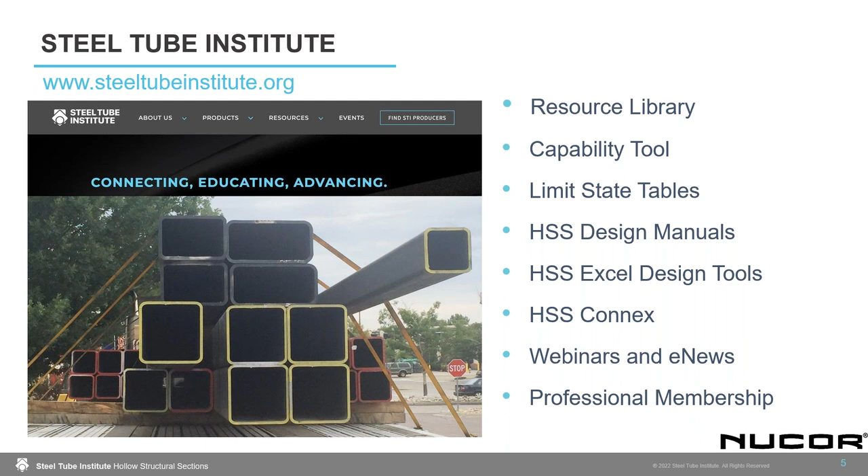Thank you, Kathleen. Hello, everybody. Good morning and good afternoon. As Kathleen mentioned, today we're going to talk about HSS welds.

So what's the big deal? Why do we need to devote a webinar to those welds? They're pretty common, and there are definitely some best practices that will lead to more economical structures and happier fabricators, which in turn leads to happier designers.

So we're going to talk through some general considerations, how you actually design those welds, then some considerations that maybe we as designers don't always think about when it comes to the person actually performing the welding. And then we'll touch on AESS at the end of the presentation.

This structure that you see here on this slide does have architecturally exposed structural steel in that roof member.

We were involved in the connection design for this fabulous structure at Lewis University, thanks to White & Company.

As I go through our talk today, I want to first clarify some terminology I may use, as I might bounce around a little. When I talk about a branch member, that's what's being connected to the main member. A branch member could be a plate, or it could be a branch like in the traditional sense of a truss member. Chord members are typically what we're connecting to the main member that is continuous. So for the connection on the left, that would be the column, or again, in a traditional truss, we know what a chord member is.

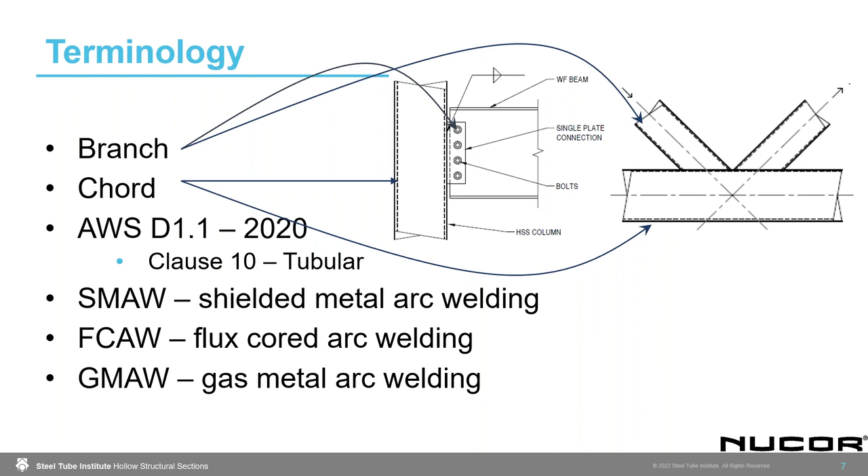There are some quotes that have been made. These, I think, are most impactful to me when thinking about HSS welds. Blodgett says, provide a path for the force to enter the part that lies parallel to the force. Well, thinking through that with an HSS, that can be complicated, as the path is most likely to the sidewalls. Dr. Miller says a good welded connection has a clear and direct load path. Again, with an HSS, that can be a little bit difficult.

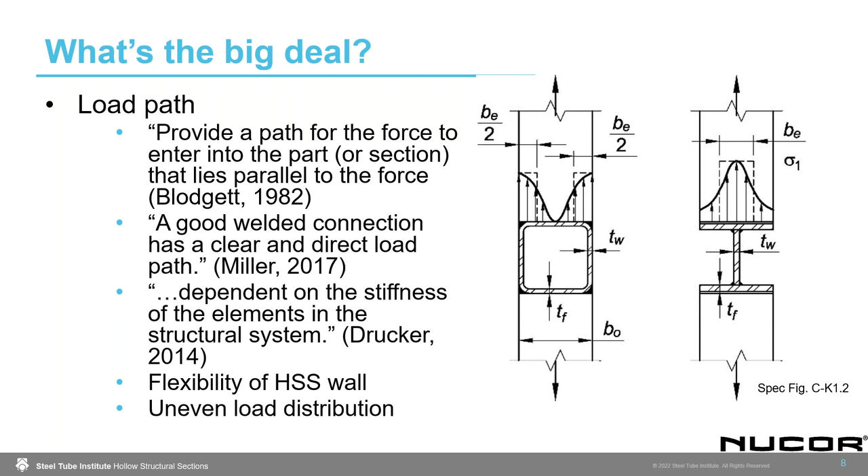When we're talking about HSS welds, one complication is that we can only weld from one side usually. So that usually will lead to larger weld sizes. Also, what's a little bit unique about HSS connections, as you likely know, is that the member selection or the member thickness is tied to the connection capacity significantly. So that causes some issues in the way that we typically design our connections.

Some EORs don't design connections. They will design the member, and then there will be a delegated connection designer that has to take care of the connection part. That leads to issues because often the connection capacity is tied to the member thickness, and therefore when we have the discontinuity between the two parties involved in that design, that can lead to some issues. So it's super important, and I hope I'm making my point here.

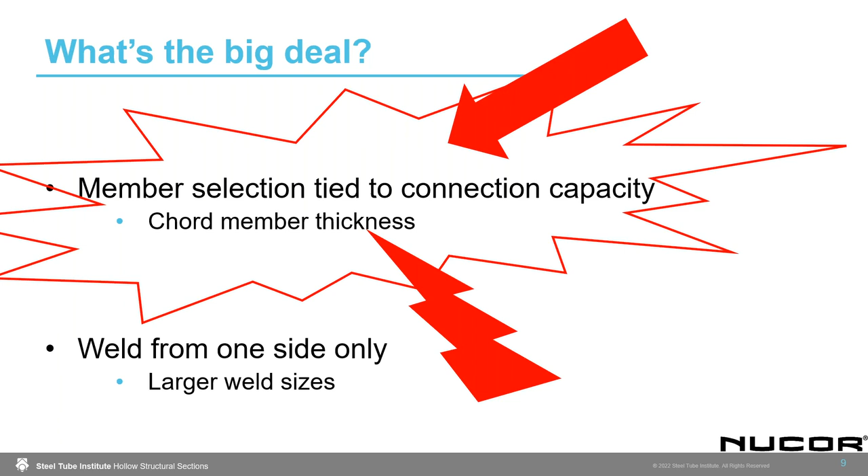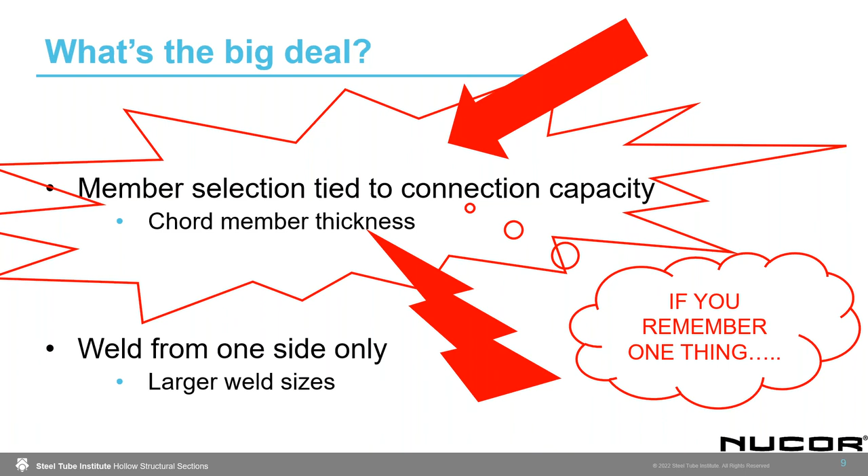If there's one thing that you remember from today, it's that the demands on a connection may require the member size to be increased. This is very different than the philosophy we typically follow with open shapes. And it's very important for the person designing the main member to actually think about the connections as well, even if you aren't the one responsible for designing the final welds, bolts, and plates to it.

So there are a few general considerations I want to talk about as we get started. First is a design philosophy when it comes to sizing welds to HSS members. There are two different design philosophies that have historically been employed.

The first is to develop the yield strength of the plate or the HSS member. That's easy on our drawings—we don't have to think about the forces, we just say develop the yield strength of the plate and HSS branch. However, I hope we recognize that because this is the upper limit, it's very conservative, and in most applications it's not needed. There are some reasons for doing that, but it's really not required because it's a very uneconomical way of designing your connections.

The second option is to resist the actual applied force in the plate or in the branch that we're connecting to the HSS member. This is really where today's presentation is going to focus, because it's the most economical way to design these connections. This is where I want us to pay attention as we go through these welding provisions today.

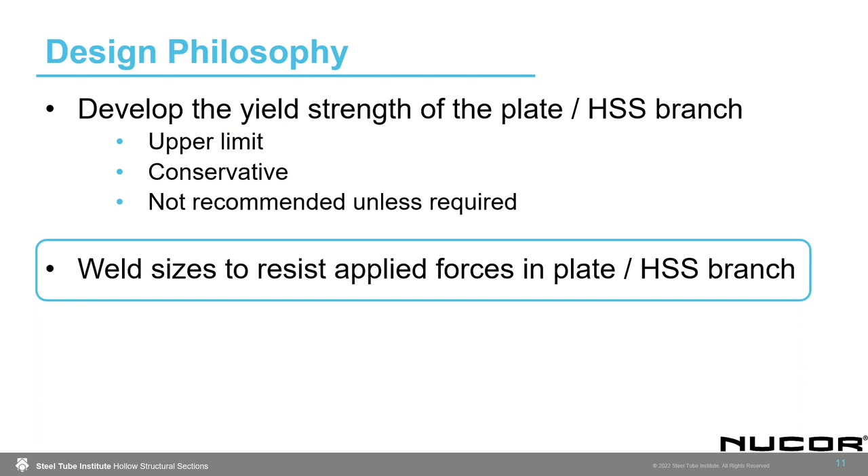Additionally, the larger the tube we're connecting to—the thicker the tube—the larger the corner radius is. 2T is the average for the industry for the corner radius, based on the thickness of the tube, so a thicker tube has a larger radius. The larger the radius, the more we can run into issues where we need backing, which we'll talk about in a bit, impacting both design and fabrication costs.

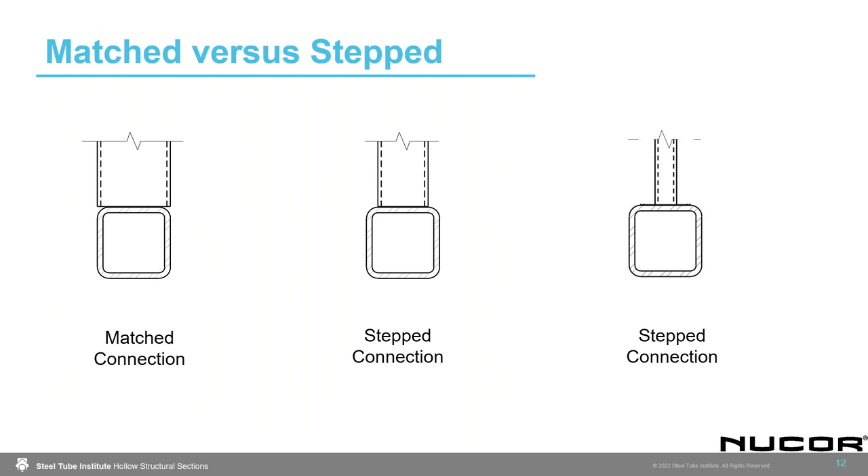However, if the element we're designing is maybe a roof truss or a bridge over an overpass, where we're looking at it from a large distance away, I might not be able to tell that we're looking at a matched connection versus a stepped connection. So it may be worth bringing this up to your designers that there's some significant savings if we can make these branches a little more narrow so that they can be welded to the chord members using fillet welds and avoid the complexity of a matched connection.

Likewise, I think we can bring up the same topic as designers with K-type connections. As defined by the specification, you more or less have an equivalent load coming in and going out of each branch member that defines a K. There are two different types, gapped versus overlap, and these two types have very different fabrication costs.

Overlap connection, you typically end up with a stiffer joint, a stronger joint there. So we may lend ourselves to that type of connection. It's also great for fatigue.

However, think about the logistics of putting that together in the fabrication shop. Historically, in a gap type connection or other truss type connections, we have some flexibility for fit up. We can tack weld those members together before we perform our final welding to make sure everything's going to go together easily and adequately. With an overlap connection, I don't really have the ability to do that. I have to make some final welding because one of those toes, the hidden toe, is going to get covered up by another member. So I might need to make some final welding before I'm sure everything's going to go together well and easily.

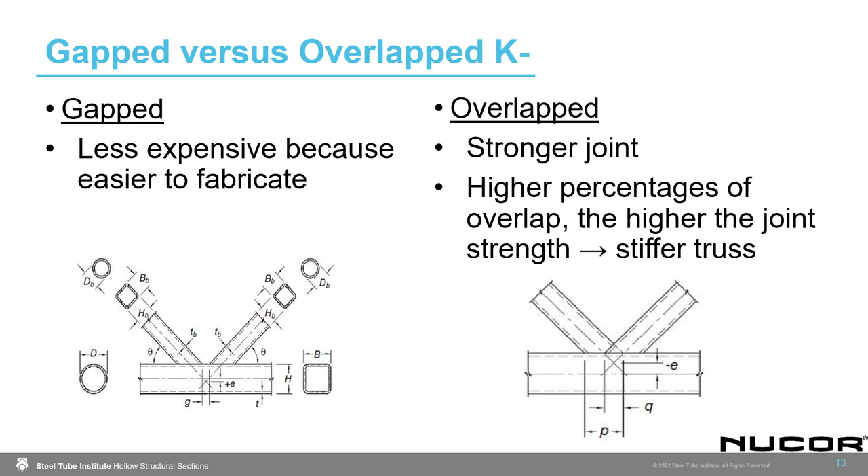Think about also putting these members all together. When we put them together, we have to make cuts to make sure they fit. The fabricator has to cut them. We can't always have a perfectly square cut. Unfortunately, most things don't always go together that way for HSS. So you may have something like these two diagonal branches here, where we've got cuts at 45 degrees. For rectangular sections, it's not the biggest deal.

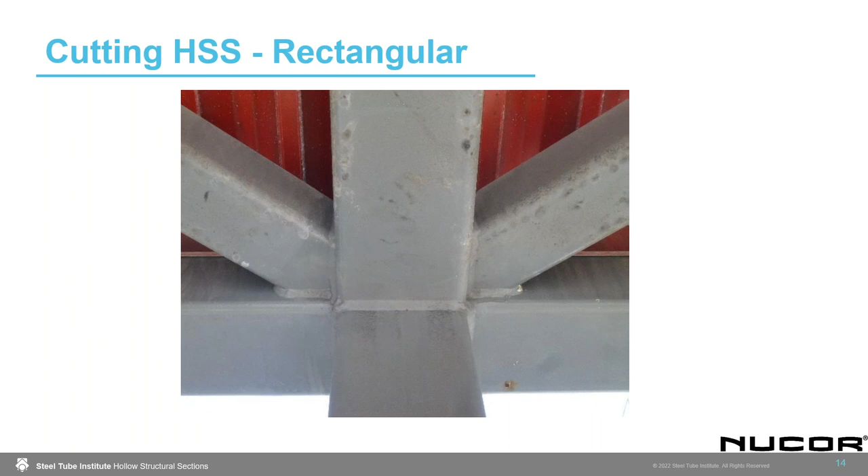It's much easier to make those cuts at a certain angle, and the fit up of this particular joint can be put together. But think about a similar situation where we're trying to make the cuts on these round sections. This particular example isn't so bad, right? We've got a very large tube that we're connecting smaller branches to. So while it's not going to be a square cut, there is some profiling that needs to occur to put all these pieces together.

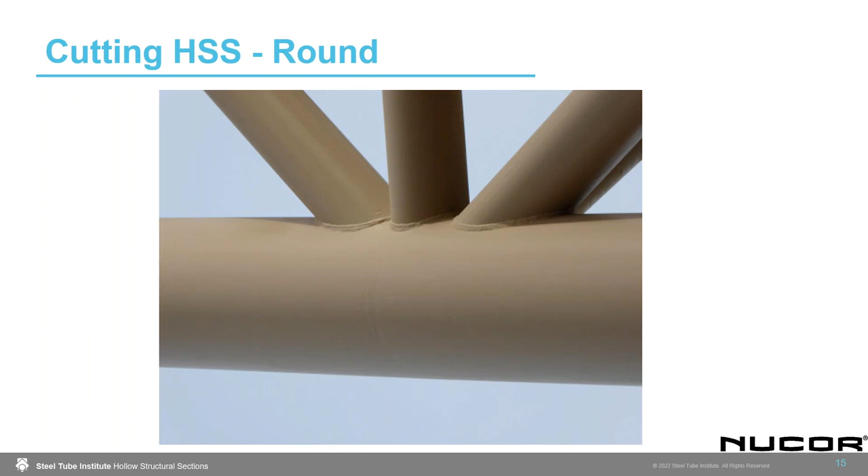But if you think about something like this, where maybe we've got a 10-inch OD branch member coming into a 10-inch OD chord member, where they're kind of a quote-unquote match type connection for rounds, there's a significant amount of profiling that needs to go into the cutting of these round sections.

Historically, that's been done by paper templates and then cutting it by hand. More often now, there have been some advances in laser technology and tube lasers, which is what you see in this picture. What I want to impress upon you is that this is another piece of equipment, and you can imagine that using round members is likely going to be more expensive in fabrication than the square members, which are a little easier to cut.

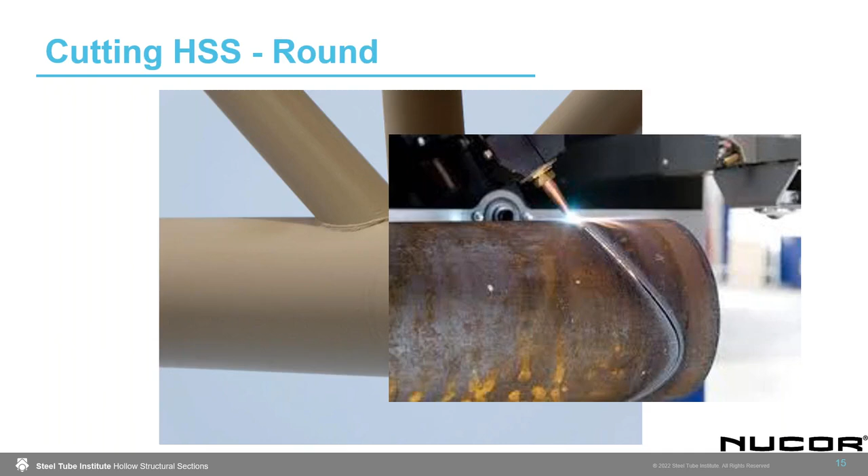Some of the technology available here is this Vernon tool offered by Lincoln Electric. This is an industrial pipe cutting and CNC pipe profiling machine, which you can see the different types of cuts that are applicable, or that the machine can perform.

That 90-degree saddle is very much like what we were looking at in the previous slide, where the cutting is actually taking place. But think about something also like this 45-degree lateral, maybe a branch member coming in at a 45-degree angle to another round member. So we've got a lot of complex profiling that needs to occur to get that fit up just right. Obviously, you can see the benefits of using a tube laser for that cutting to get that connection put together adequately.

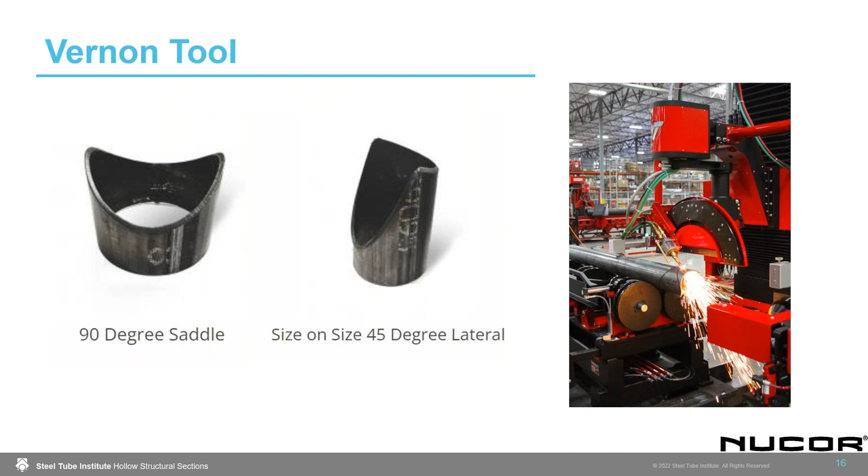Another thing to think about with rounds versus rectangulars is actually putting this together. We talked about the differences between rectangular sections and round sections in cutting in the previous two slides. Now let's actually put these pieces together.

So here you can see we've got two verticals. We'll assume this is a continuous chord member, and now we need to add another branch member in the middle. This will have square cuts at each end, and you can just slide it into place very easily, right? With the square cut, it can be slid into place.

And then if we've got some branches coming in, or some diagonals coming in at 45 degrees or whatever the exact angle is, again those are going to have kind of those square cuts, but at an angle. But again it can just be slid into place, and it's all going to fit, and then can be welded from there. But let's think about that for the case of a round HSS truss.

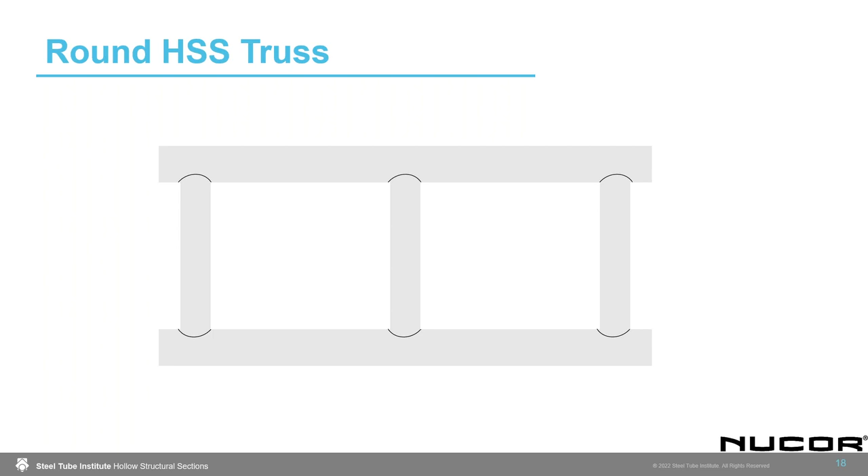So again, with the same starting point where we've got two chords and two branches, like a T connection, if we want to add an additional branch in between the two, how do we get this into place? We actually have to splice this member in order to get it into place. We put each half in and then splice the piece together to be able to install it.

Then if we've got some of the diagonals like we had in the previous example, how do we get this guy in now? Because of that rounded member, we can't slide it in. The ends have to be profiled in order to make the welds. So it's very difficult to fabricate something out of round HSS like this.

There are fabricators that are very good at it and do a great job of it, and it can be done. I'm not saying that it can't be done. These are just some of the factors for you to think about as you're selecting your members and sitting with your designers, that it might be a more economical option to fabricate based off of rectangular sections.

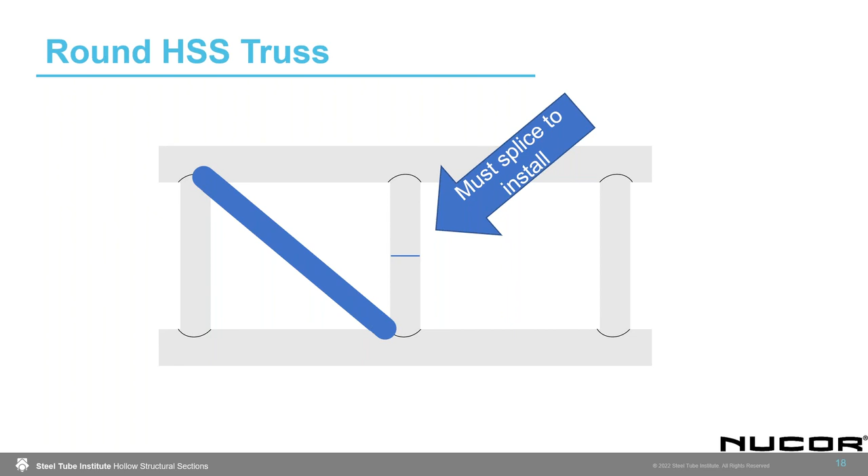All right, a little bit about weld effective length. Going back to what we were talking about for welding across the face of an HSS, which we started in I think the first slide of the presentation - if we're designing to resist the actual loads, as I mentioned, we're going to spend most of the time today talking about, we have to account for the non-uniformity of the load itself, of the stress in the weld.

As we mentioned earlier, the HSS wall is stiffest at its ends, closest to the sidewalls, and it's lowest in the center. The weld could unzip with cracking, and that's going to start at the extremity, so on the outside.

So for transverse elements, we need to use an effective width when we're designing transverse to the longitudinal axis of the member. Even though the full weld isn't effective - we don't use the full length in our calculations because it's not effective - a continuous weld is still required. I want to make sure that's clear, that still needs to be employed.

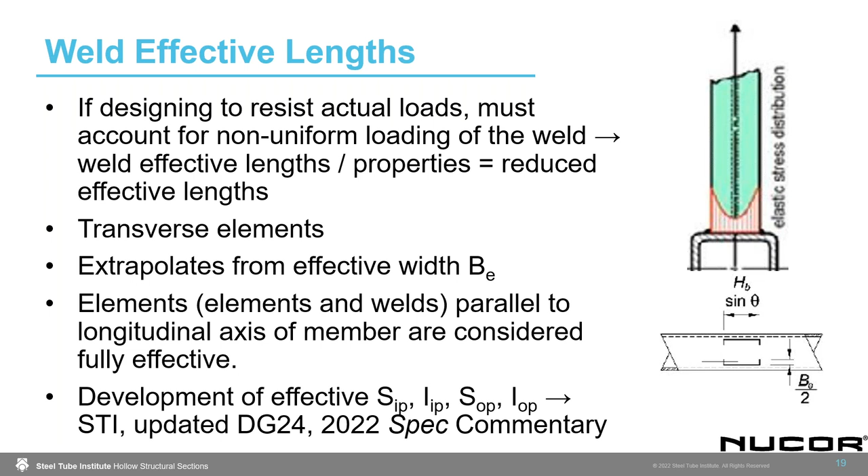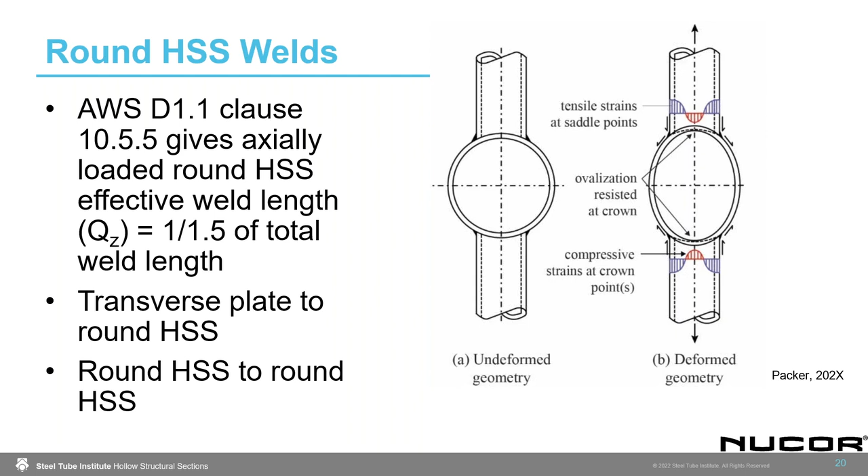So that implied 2/3 of the total length is what we had to go by previously, and this would apply to a transverse plate, to a round HSS, or round HSS to round HSS. It isn't always super clear, so a great addition to the 2022 specification, which will be out later this year, is the addition of these effective weld properties for connections to round HSS. This is new in 2022.

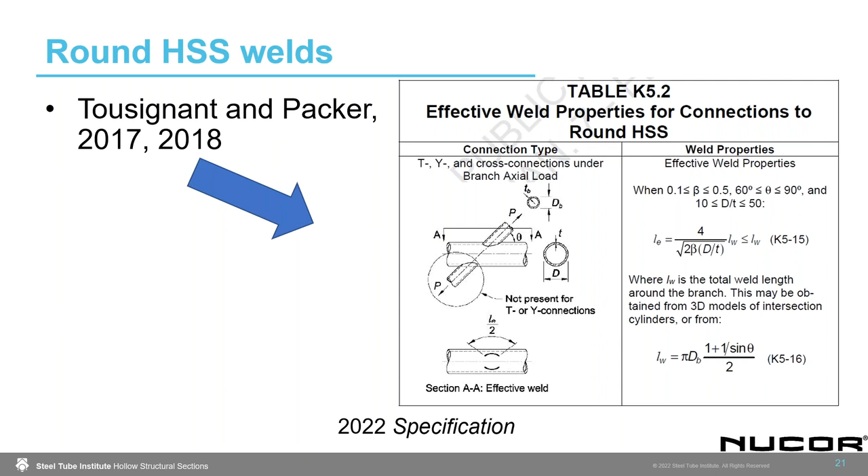It's not in the specification right now. As I mentioned, it'll be out a little bit later. This is based on some research done by Dr. Packer and Kyle Tousignant at the University of Toronto. You can look up their technical papers if you wish to see the background behind that, but this will be employed in the specification going forth.

Another thing to think about is if we're welding round HSS to round HSS, we know we want to try and stay with a fillet weld because we know those are most economical. But it's likely going to be difficult to obtain the full fillet weld throat thickness. The dihedral angle of the joint needs to be maintained. This likely can only happen with a fillet weld if you've got a small beta, so a small ratio of the dimensions from the branch member to the chord member. That dihedral angle needs to be maintained between 60 and 120 degrees, which is kind of difficult.

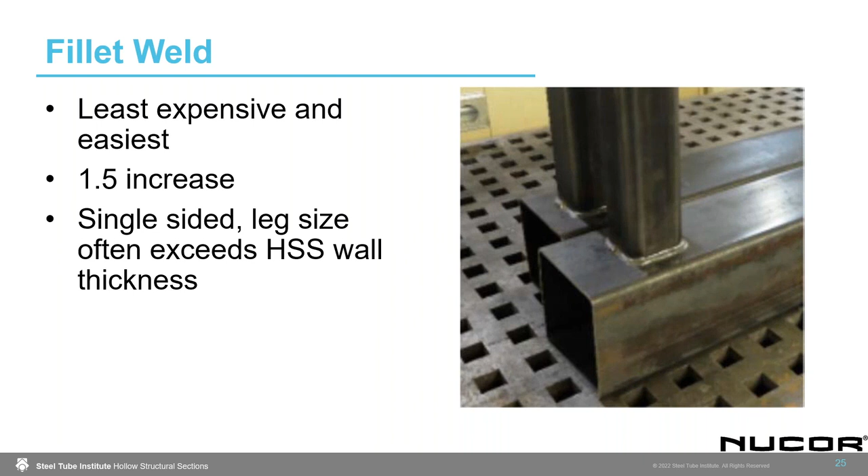So yippee, thanks guys. All right, let's move forward to a little bit more discussion on HSS weld design, starting first with fillet welds. We love them. It's well known that these are the least expensive and easiest welds to make. There are considerations for a 1.5 increase that we need to talk about coming up here. But as I mentioned earlier, I want to reiterate here, the biggest difference between HSS connections and connections to open members like wide flange channels and angles is that they have to be single-sided. We don't have access to both sides of a tube wall typically. And so the leg size can often exceed the HSS wall thickness.

There has been some misuse of a particular spec item that I wanted to bring up just to clarify. This particular clause that I'm referencing here in D1.1, and also occurs in the AISC 360 specification, talks about a limitation on the size of the weld that is applied to an edge of a member. The reason for that is that you might melt away the top edge of a member.

You would end up with a normal weld toe, but the corresponding weld throat thickness is much smaller than intended if you melt away the top edge of that member. The provision states that the maximum fillet weld should be the thickness of the member minus 1/16 of an inch, so you can confirm the edge is not melted and the proper throat thickness is achieved.

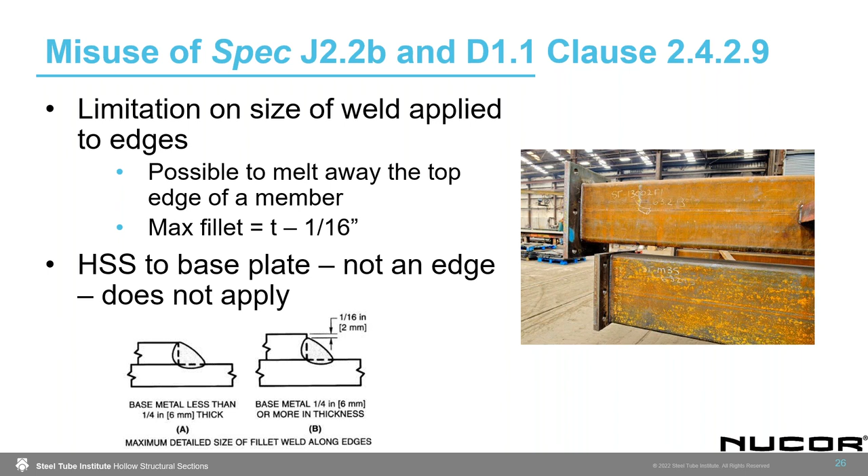When we're talking about HSS to base plates, these are not an edge, so this particular provision almost always does not apply to HSS connections.

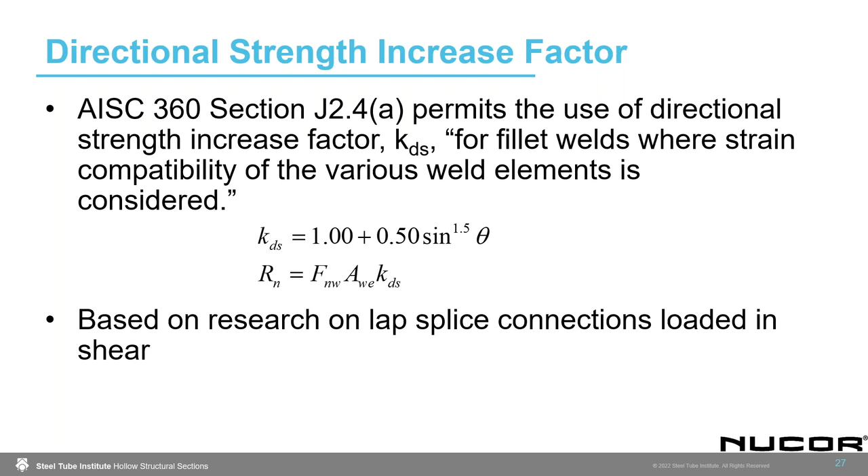The directional strength increase factor has been in the specification for many years. It's based on research on lap splice connections loaded in shear, and additional recent research has brought it into question. The specification states that we can increase the strength of a weld by a factor ranging from 1 to 1.5 for fillet welds where strain compatibility of the various weld elements is considered.

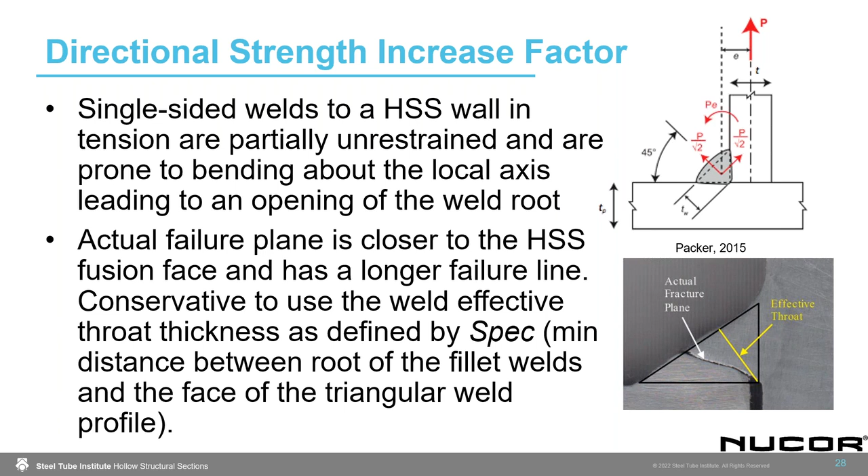Going forward, what we've found is that single-sided welds to an HSS wall specifically, though it's pertinent to think about single-sided welds this way in general, are partially unrestrained when in tension. This can induce bending about the local axis, leading to an opening in the weld root, as shown in the diagrams. The actual failure plane is closer to the HSS fusion face and has a longer failure line, so it's conservative to use the weld effective throat thickness as defined in the specification. The restraint provided to the fillet weld depends on the HSS wall thickness, shape, weld size, and penetration.

The effect of this bending about the weld root is much more severe on rectangles than it is on rounds. A weld that is round in shape has more restraint to it than one along the face of a rectangular HSS, which is more linear. The research supported this theory and found that the directional strength, or 1.5 increase, doesn't result in an adequate safety factor as outlined by the specification.

In the previous specification, this was implied. In the upcoming specification, it's very clear that the 1.5 increase cannot be applied to rectangular HSS in tension. It can be applied to round HSS in tension, and it can be applied for double-sided fillet welds, like welding a plate to an HSS, whether round or rectangular, as long as you're welding on both sides, such as in a single plate connection, if in tension. It cannot be used for the effective lengths given in K5. So that's a bit of clarification on when and where you can use that 1.5 strength increase.

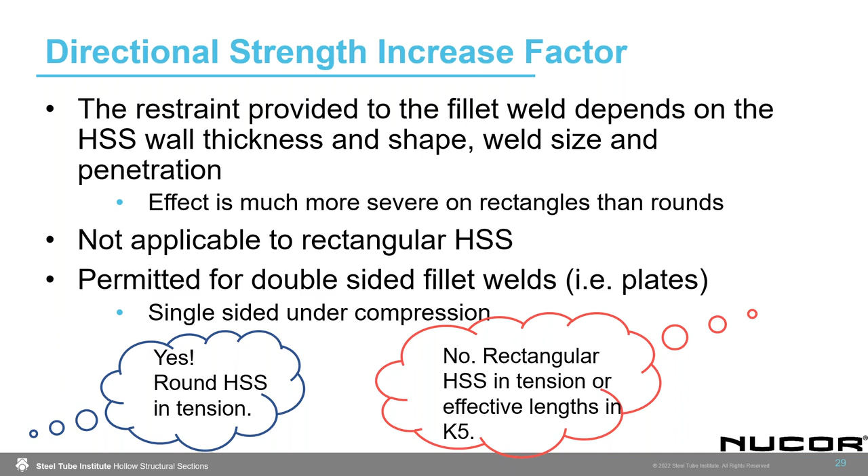When it comes to fillet weld design, there's a table like this. It's in Design Guide 24 and is updated in the newer version, but we also need to check the weld metal and base metal for shear when welding to HSS.

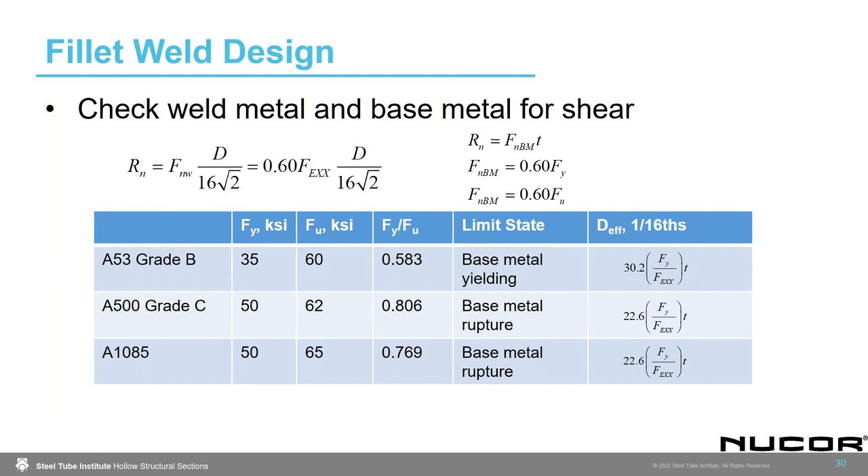A500 material in the marketplace is all grade C or dual graded B/C. This table is much easier, especially if you ignore A53, which I hope nobody is using for their design. If we just look at A500 grade C or 1085, depending on which you're using, base metal rupture is always going to control, which simplifies our weld design going forward.

There's a rule of thumb I've been asked about in the past that I wanted to clarify. It states that a fillet weld equal to 1.1 times the thickness of the branch will develop the yield strength of the branch member. You can find that in the specification commentary in K5, and it's also referred to in the Steel Construction Manual Part 8. That originates from work published in IIW in 2009 and also in Eurocode 3. Recently this has been confirmed for rounds, so it still can be used as a rule of thumb for rounds.

However, for rectangular sections, it actually looks like that factor should be more like 1.3 rather than 1.1. This hasn't been codified, it's just a rule of thumb, but if you are using or have used this rule of thumb in the past, you might want to take a look at and confirm it for rectangular sections.

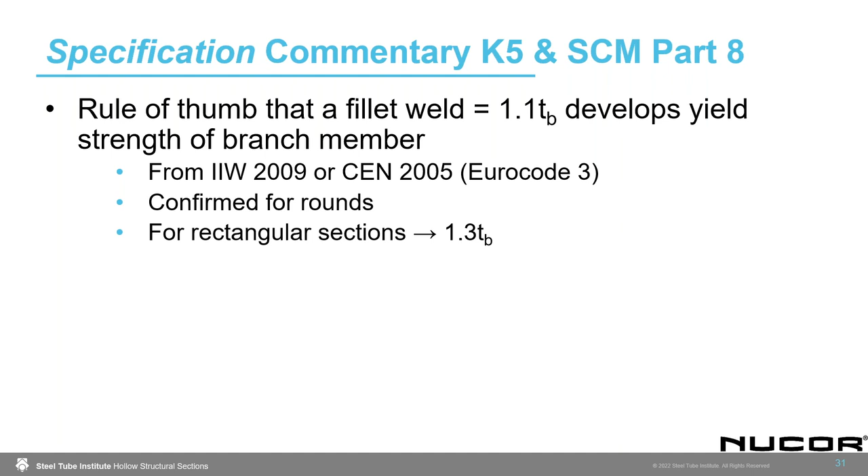Again, hopefully we're not developing the yield strength of a branch member on a regular basis. We're designing for the actual applied loads.

PJP welds are something that I hope we can employ more often, as they can be a much more economical solution rather than going straight from a large fillet weld to a complete joint penetration weld. CJPs require backing and specially qualified welders, so it's a reasonable consideration to look at partial joint penetration welds.

Welding full thickness for HSS is just complicated. The effective throat for those PJP welds is given in the specification in table J2.1.

Obviously, we don't often use or don't know what welding process exactly is going to be used. So it's really best that you specify the effective throat that you're using for your design. Rather than specifying anything else, just put that E in parentheses in your weld symbol, and then the fabricator has the ability to figure out the rest and do it how it's most economical for them.

Much like the single-sided fillet weld discussion that we had previously, you should also ensure that rotation about the root of a partial joint penetration weld can't occur.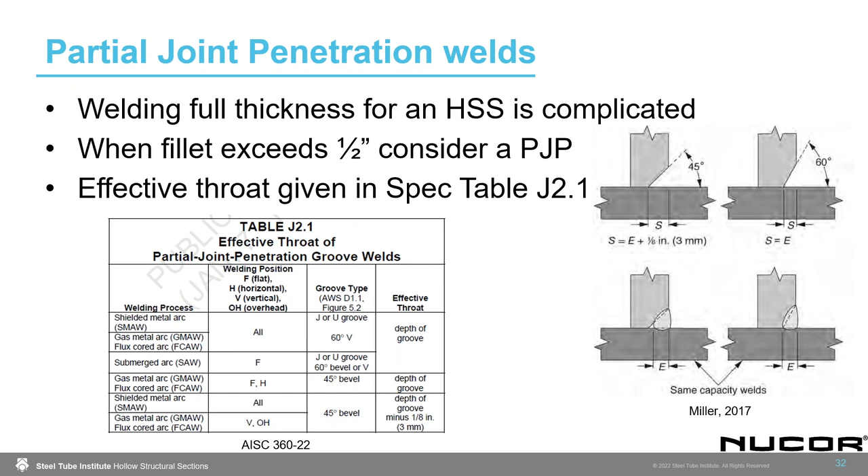Another option, if a partial joint penetration weld is not quite enough, again trying to avoid going to that complete joint penetration weld, we can reinforce a PJP. That's definitely an economical option. The capacity of that reinforced weld does not equal the sum of the individual capacities.

Again, we should specify an effective throat, which will be the least dimension from the weld root. Those are given by these diagrams, which can be found in D1.1 in figure 4.2 through 4.4. The important thing here is that we need to be considering the Z loss at the root for the 45-degree bevels as well when designing these.

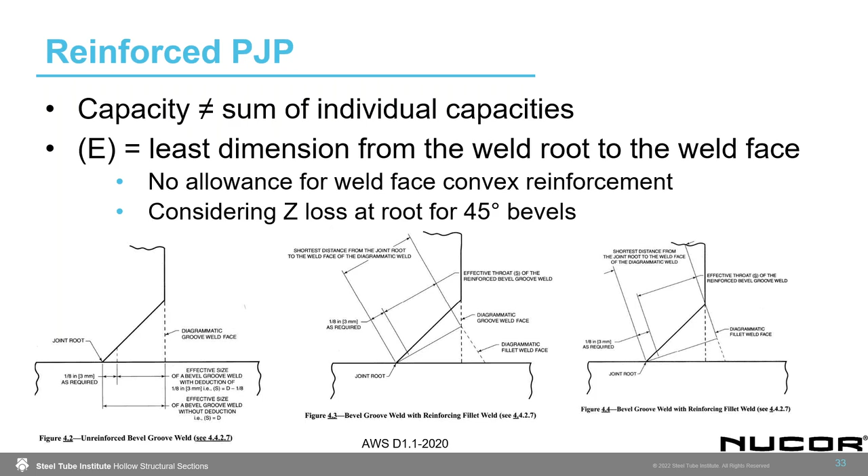Flare bevel and flare V groove welds are very common in HSS because of that corner. If we're welding to the corner of a tube, we talked about those when discussing matched connections. The actual corner dimension, as I mentioned, was 2T on average, 2 times the thickness of the tube on average, but it's going to vary in size from mill to mill. Every HSS producer is likely going to have a slightly different corner radius.

The effective throat is a function of that, though. It's given in the specification in table J2.2 and in D1.1 also. This gap that you see in that picture on the bottom left there at the weld root is common because we can't get full penetration, and that's accounted for in the Z loss calculations.

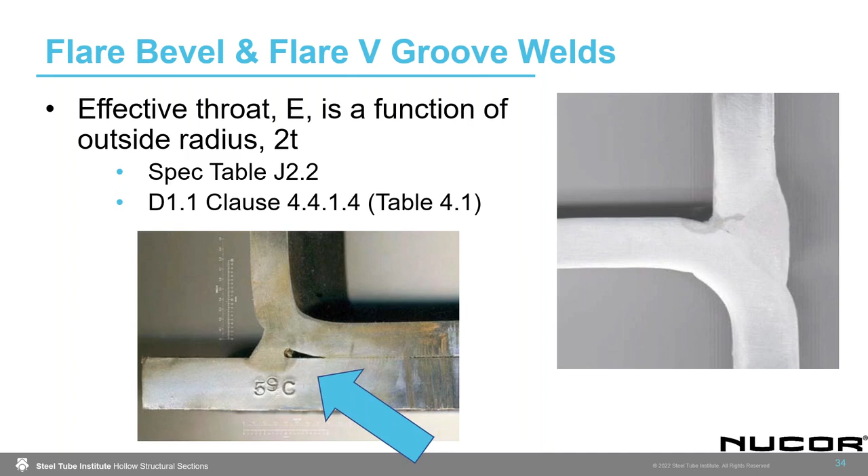These assume a weld flush to the outside of the HSS, and as I mentioned, it does take into account the typical Z loss at the root and a typical HSS radius. But these numbers given here in this table, in this specification—what I want to impress upon you is that these are maximums.

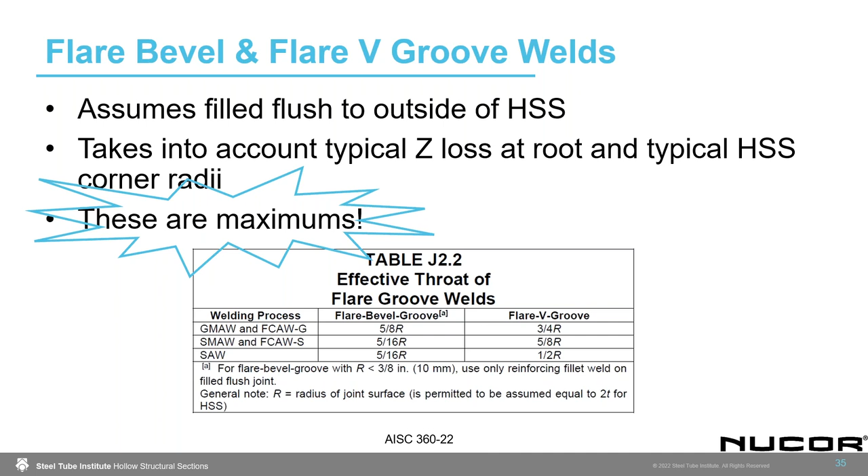So a weld flush is not necessarily what we need to have everywhere. This is definitely a case where if you don't need it to be flush in every single case, please put the effective throat that you do need in the weld symbol, and that will allow the fabricator to design accordingly. I have a fear that we put this weld symbol on all of our drawings when we don't necessarily need it, resulting in a lot more welding than we actually need for that joint.

We might be able to save some economies by actually specifying what is required. An underfilled joint is okay and can save money. D1.1 requires of us as designers to specify the effective throat for the PJP weld. I don't think we always do that—I know that I'm likely guilty of not always specifying it, but it is required.

Varying corner radii on the square tubing affects the amount of weld that is required, but these unfilled edges are okay as long as the effective throat is achieved.

What you see in diagram B is perfectly acceptable as long as the effective throat specified on our drawings achieves the design intent. The one exception is for architecturally exposed structural steel. The Code of Standard Practice says that underfilled joints for flare bevel groove welds or flare V groove welds have to be filled flush. That's the one exception for that AESS category.

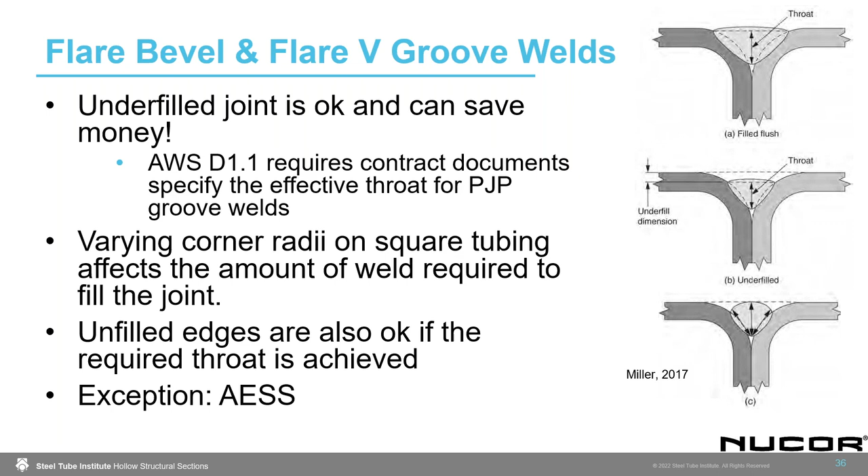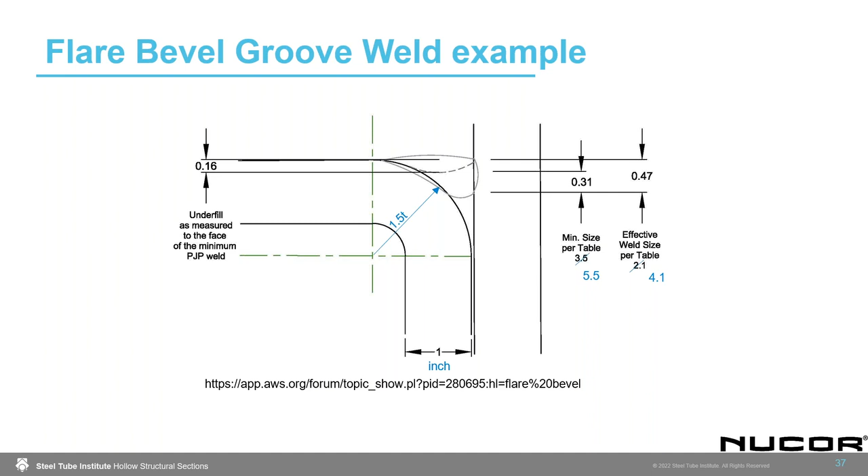I often look through the forum that AWS puts forth to see what questions are being asked. This is one example of exactly what we were talking about, where someone was asking if this underfilled joint is acceptable. The answer is yes, and you can see how they're actually measuring that effective throat at the weld.

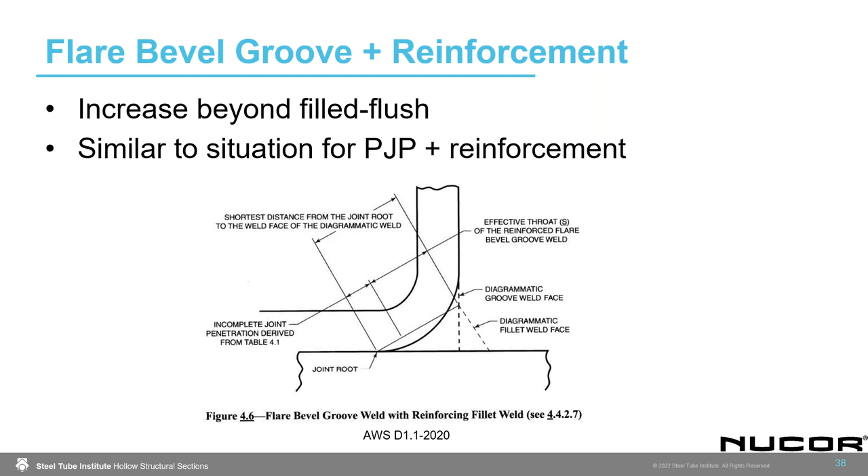Just like partial joint penetration welds may add some reinforcing, we can also add reinforcing to a flare bevel groove weld if we're welding a plate to the corner. If we have a flare V groove weld welding two HSS together, that's much more difficult to add reinforcing. But if we've got a face where we can land that fillet weld acting as reinforcing, that's an option and another way of achieving a weld that may be more economical than having to go to a CJP weld.

I mentioned earlier in the presentation these matched connections and the trouble they can lead to. It's really impactful for the larger, thicker tubes as the radius gets larger, making those matched connections or flare bevel groove welds difficult.

The root gap is limited to a 16th inch as detailed and an 1/8 inch as fit up, prescribed by D1.1. So if it's not within that, then it can't be pre-qualified, and you end up having to perform additional work.

We talked about cutting rectangular sections and how it's pretty easy to make a straight, flat cut. Here's an exception though. We might have to profile a rectangular section so that the side walls that are longitudinal to the chord member are longer than the ones going across the transverse face of the tube, in order to make that weld with the appropriate root gap.

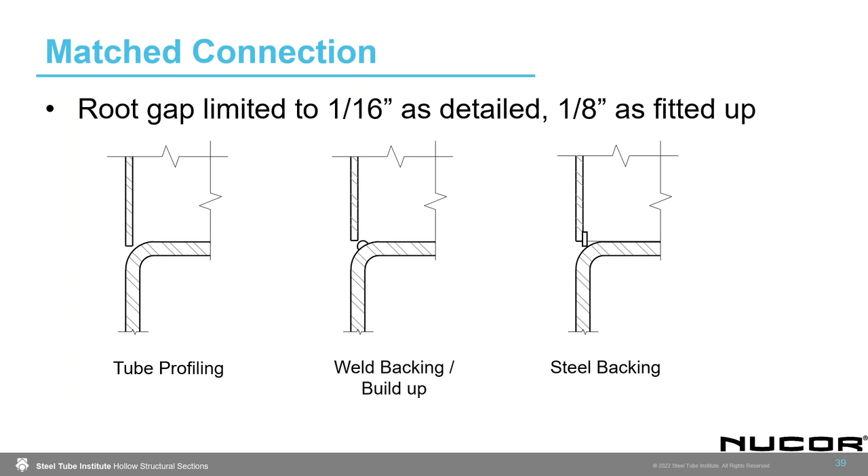Another option would be providing weld backing or building up the weld to provide that backing in the joint. The third option is providing steel backing, where we get into a situation that looks a lot like a complete joint penetration weld, and we have to provide backing in order to minimize that root gap.

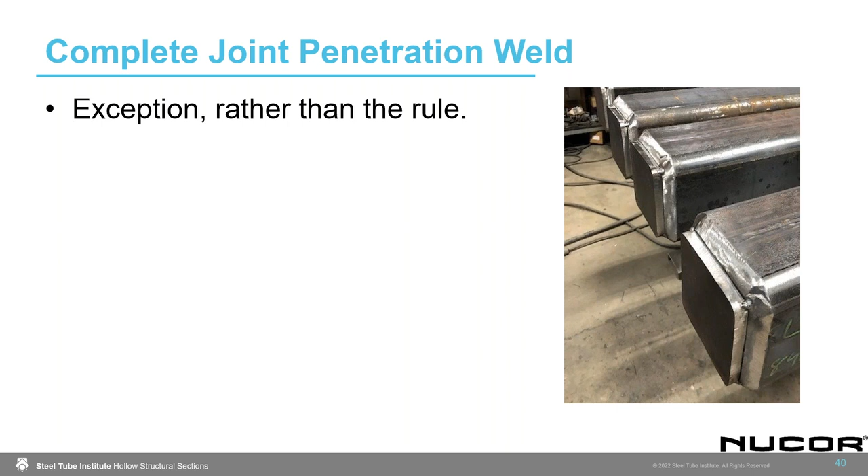A CJP weld should be the exception rather than the rule. There's a lot of work that goes into these. The backing is complicated and can't be removed, so it's something we need to try never to specify. I'd argue that if you have to have a CJP weld, maybe this is a good place for a casting. There are many casting manufacturers with off-the-shelf castings that may be a good application if you're looking at having to do a repetitive number of CJP welds.

The backup weld at the root must be placed from the outside, obviously, which requires very precise root preparation. It's very fabrication intensive.

If the specific weld can't be backed, it also requires a 6GR certification. In the United States, if I'm trying to find a 6GR certified welder in Houston, around the offshore industry where they do a lot of these welds in very large sections, it's probably not the end of the world and easier to find. But I sit today in Denver, Colorado, and it's very, very difficult to find a welder with a 6GR certification. It's the highest certification there is, very complex, very expensive, and should definitely be avoided if at all possible.

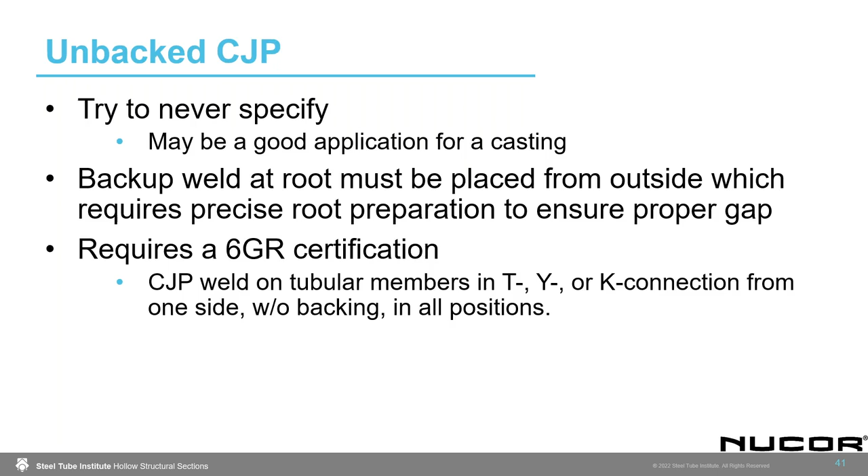For the backing, if we're allowed to back the weld, we can use that. Normally, I'm sure you're familiar that D1.1 says the backing has to be continuous. We're trying to avoid stress risers in the backing by specifying that. However, in 2010, D1.1 allowed discontinuous backing for statically loaded HSS end connections.

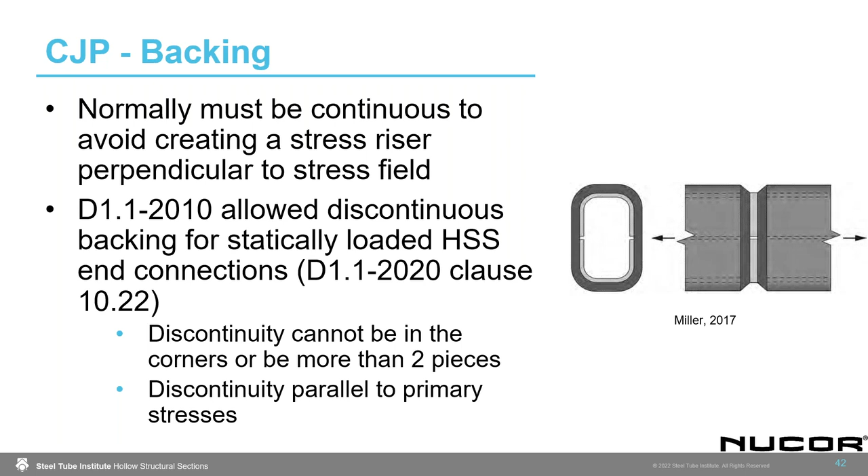It cannot be more than 2 pieces. So you can basically have 2 pieces that go inside and perform that backing, and the discontinuity has to be parallel to the primary stresses. So those are the 2 provisions that have to be met if you're going to have discontinuity for your backing for an HSS at its end.

As you know, backing can't be removed. Once it's in there after we've performed a weld, we can't really get in there to get it out. So mostly that's okay for statically loaded structures. In seismic, there are some cases where the backing must be removed. However, base plates is not one of them - you do not have to remove backing for base plates for seismically loaded HSS.

For cyclically loaded structures, we're typically going to remove the transverse backing. And of course, for architecturally exposed CJP connections, any backing that is exposed to view has to be removed. Backing in general for rectangular sections is much easier to provide than round HSS. Round HSS are going to vary on the inside, depending on the OD of the member, but also on the wall thickness. So it's a little bit more difficult to provide that for a round HSS than it is for rectangular.

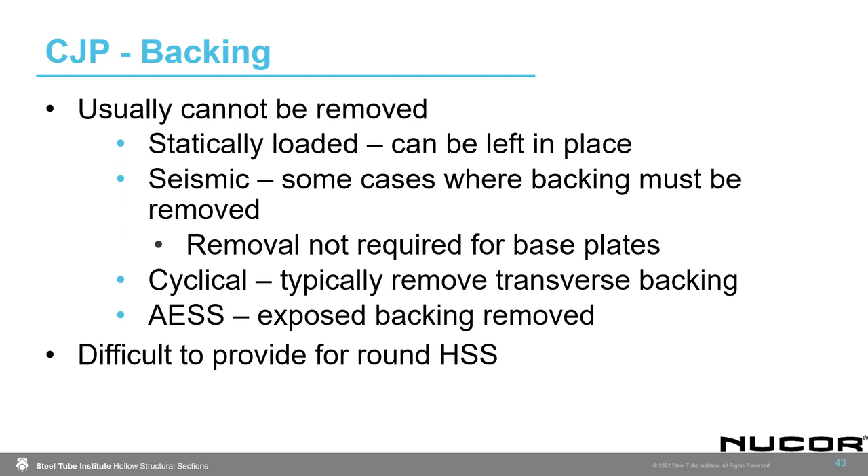When we're welding to HSS end to end, if this is a column section and we're trying to transition from a thicker wall to a thinner wall, we need to be cognizant of the fact that the bending radius of those corners is dependent on the thickness of the tube. It's also going to vary from producer to producer. So when you're calculating the amount of weld or the amount of bearing that you have, you need to be cognizant of that.

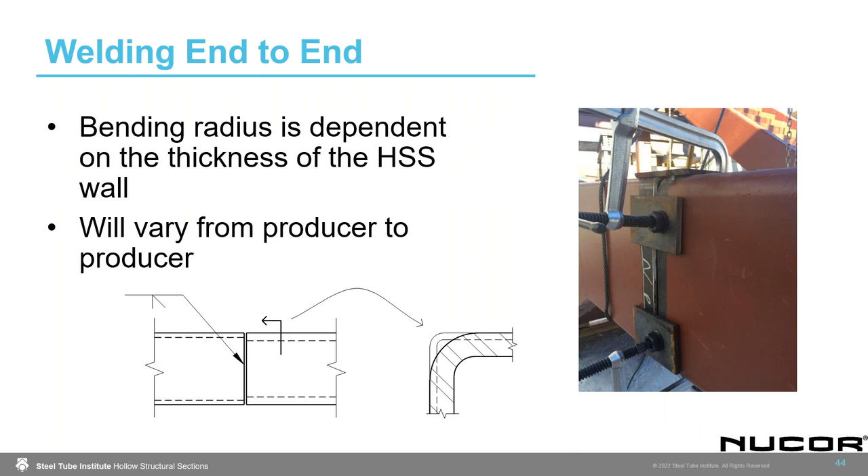Some things need to be taken into account for welders that probably aren't significantly different than what they're used to for normal fabrication processes. Distortion and shrinkage is going to happen - we've got to plan for it. Appropriate welding sequences have to be followed because they affect the shrinkage, the residual stresses, and the deformation of the welded structures. All of those factors come into play.

Some ways to mitigate that is by using local heating. Preheating the member can help with that. And if you're working with a truss, starting from the center and working your way out may help to mitigate some of those issues.

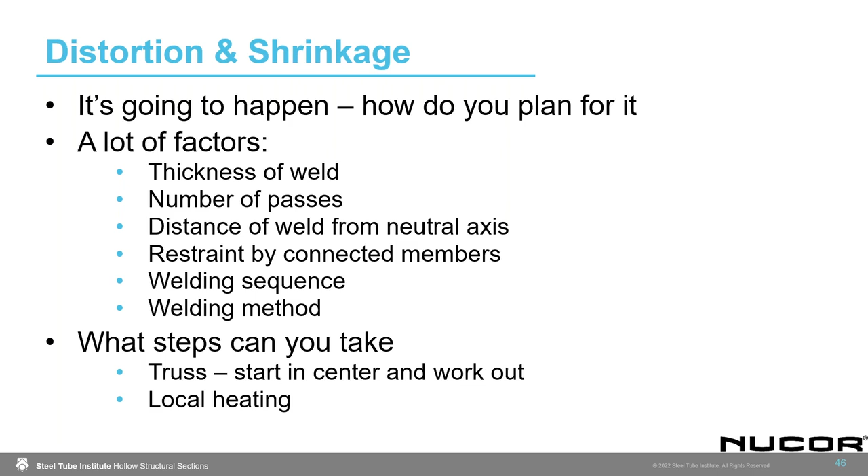When it comes to HSS, more often than not, all position capability is required. When you're in the shop, rectangular shapes can often be positioned horizontally and welded in the downward position. However, thinking about round shapes, it's constantly rotating, so that position is always going to change.

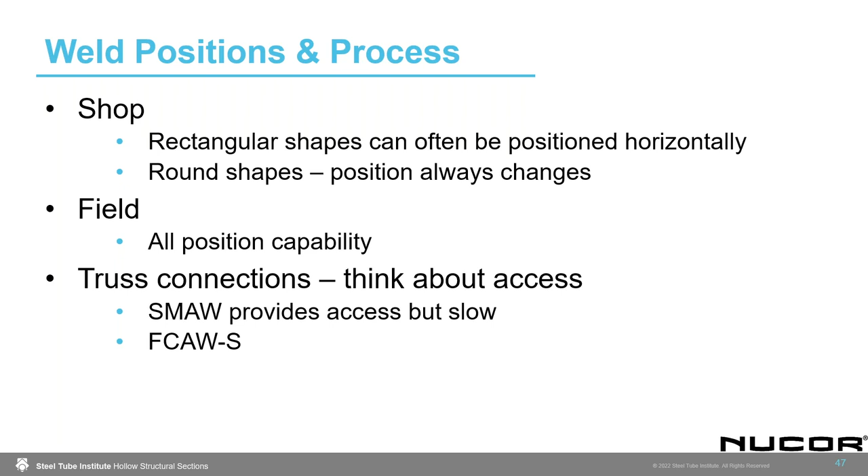Truss connections, we need to think about access. SMAW is going to provide great access, but is a slower method than gas shielded processes can offer. Using something like self-shielded flux core arc welding will overcome the visually restricting issue that typically happens with gas shielded processes. So the process comes into play, especially when dealing with truss connections.

Here you can see just some examples of weld positions and sequences. The important thing to think about, what's most significant, is that welds must never start or stop at corners - you can see that here in the diagrams for the rectangular HSS.

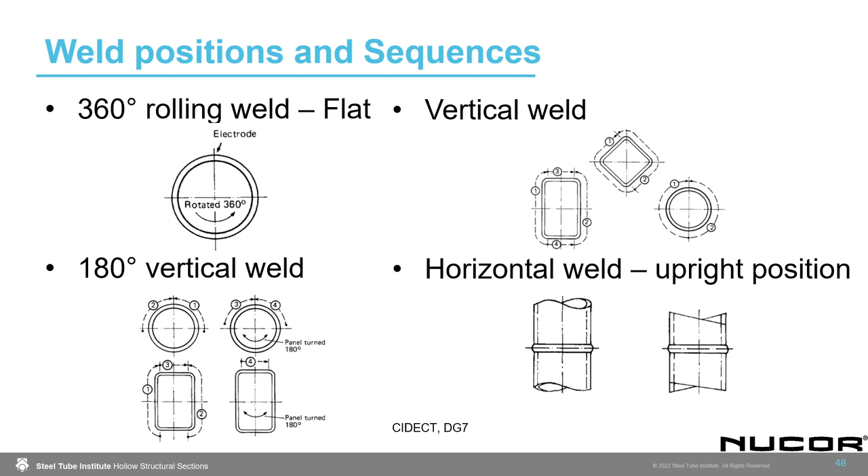And then lastly, for architecturally exposed structural steel, welding is often the preferred connection as it's very clean. The location of a seam weld is significant. I've said before that I think we as structural designers need to be specifying that on our drawings, because the fabricator is looking to us when most often they're not looking at the architectural drawings to put these structures together. A seam weld is something that, per the Code of Standard Practice for architecturally exposed structural steel, needs to be oriented away from view - and my away from view and your away from view may be different perspectives.

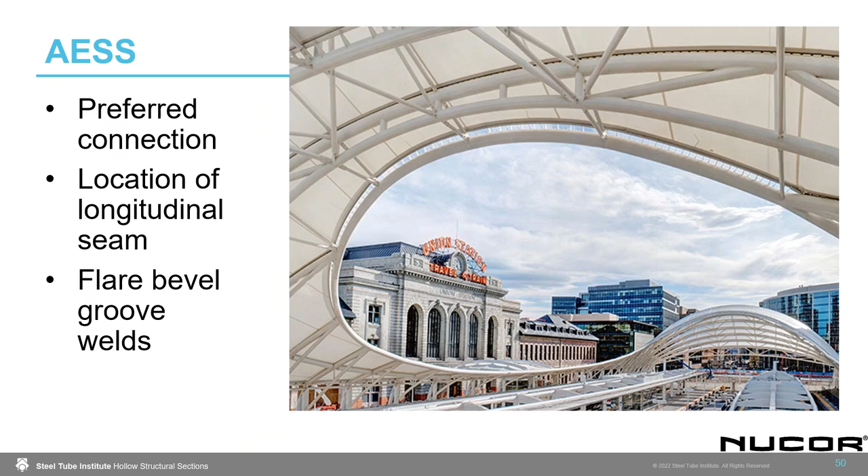I need to acknowledge two people that have greatly helped me throughout my career. I want to acknowledge Dr. Duane Miller, as his impact on our industry is immeasurable. He's retiring after 42 years with Lincoln Electric, and I used his Design Guide 21 extensively in the illustrations for this presentation, so I want to thank him. And of course, Dr. Jeffrey Packer from the University of Toronto for always answering our questions and helping us with all things HSS.

Some of the resources you can use to further learn more about welding: you can always contact the Steel Tube Institute if you have specific questions about this presentation or anything outside of this scope. Anything related to HSS tube pipe, we're here to answer. Design Guide 21 is all about welding and available from AISC, free to members. Design Guide 24 is being updated, coming out fairly soon with the second edition, and there's an entire chapter dedicated to welding with extensive information. And of course, AWS D1.1, the 2020 version, is what I used as the basis for this presentation.